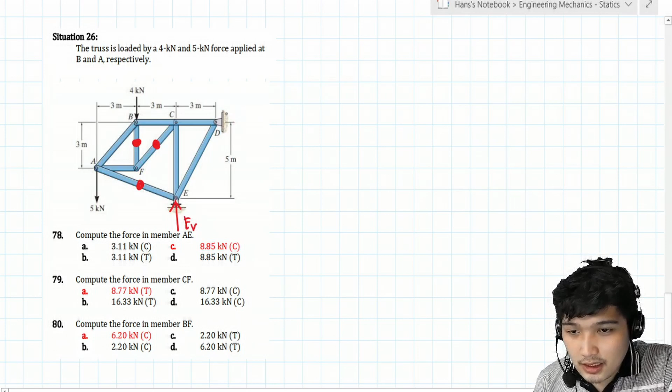Okay, so ano ang first solution dito, class? Always start from determining the value ng ating mga support reaction. So at E, meron ditong roller, so ang support reaction lang dito is yung perpendicular sa surface, which is vertical. Tawagin na lang natin tong EV, support reaction at E. At sa D, ito is naka-pin connected, so it has a horizontal component. Let's say ganyan na lang yung direction, tawagin nating D horizontal. And then pag ganito naman yung isa, yung kanyang vertical component na DV. Okay, unahin nating isolve ang mga support reaction na yan.

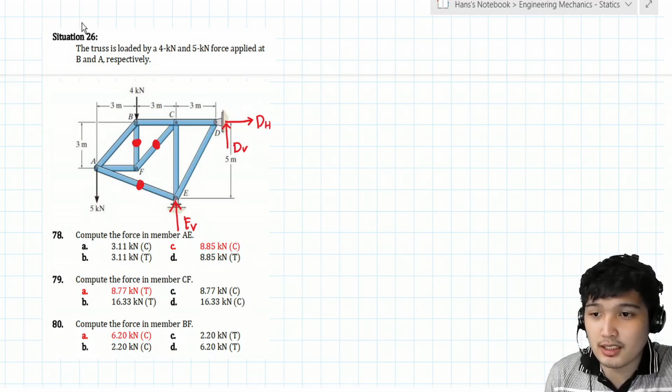So first, start tayo sa summation ng forces along X, dapat 0. Considering forces to the right positive. Ang nakikita mo dyan na horizontal force is yung DH alone, so we can say that DH from that specific problem is 0. Walang horizontal component yung support reaction at D.

So next is paano kukunin yung mga vertical. Pwede nating gamitin yung summation ng forces along Y, dapat 0, considering natin upward forces to be positive. Pero sabi ko nga, class, ito ginagamit na lang natin to counter check, yung makukuha nating mga vertical reaction using yung summation ng moment. Pang counter check lang to. We can say that yung mga upward forces is EV and DV, at yung downward natin is 5 and 4, equals 0. So ito talaga dapat yung pagkukuhaan natin.

So take tayo ng summation ng moment, dapat 0. Pipili ka ng point, di ba, at yung pipiliing point, yung location ng support. So we can try yung mag-summation ng moment at E, dapat 0, consider tayo clockwise moments to be positive. We know, roller support, walang resistance yan sa moment, so wala tayong ilalagay na parang moment reaction dyan at E. Anyways, start lang tayo mag-moment sa E.

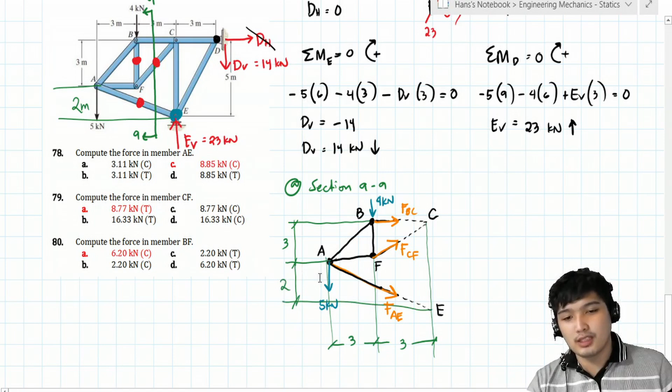So, sabi ko, anong best equation of equilibrium yung dapat natin gamitin para ma-solve natin directly yung mga hinahanap? So I think ang best doon is gusto natin, tatlo yung unknowns dyan, eliminate natin as much as possible yung ibang unknowns.

Kung ang gagawin natin, kung magmo-moment tayo dito sa imaginary point C, etong FBC and then FCF, parehas silang dadaan dun sa imaginary point C. So pag nag-moment tayo, may eliminate sila. And then ang matitira, eto na lang, AE. I think isa yun sa best na equation of equilibrium na pwede nating i-utilize.

So we take summation ng moment doon sa imaginary point C. Dapat 0. So we consider clockwise moments to be positive. And itong FAE,

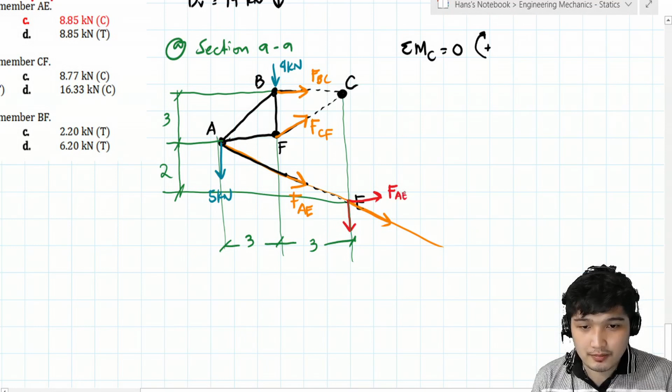Naka-incline siya, so gawin natin, i-components natin siya. By property ng transmissibility ng force, pwede natin siyang dalhin dito kasi ito yung line of action niya. Ang components niya is pwede nang mapunta dito. So ito yung magiging FAE na vertical component, and ito yung magiging FAE na horizontal component. And ito yung vertical.

So paano makukuha yan yung mga components? E di analyze natin yung triangle. So yung triangle neto is what? 2 ang vertical and then 6 ang horizontal. So with that, para siyang pwede nating palitan na lang ng 1:3, kasi 2:6, di ba? So palitan natin ng 1:3.

And this one magiging square root of 10. Okay, so analyze muna natin for the horizontal component, that is yung magnitude ng total force and then times yung horizontal 3 over square root of 10. And then for the vertical one, magnitude FAE and then yung vertical 1 and then hypotenuse square root of 10.

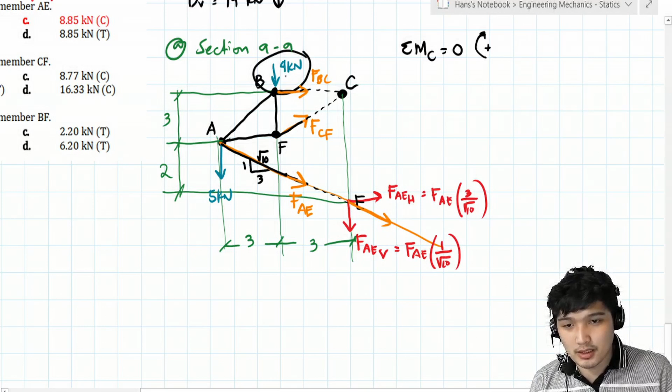Okay, so ayan, start na tayo mag-moment sa C ng lahat ng forces. Pwede mong gawing practice, unahin mo muna yung mga external forces. Unahin natin itong 4. Yung 4, counterclockwise ang moment sa C, ang moment arm is 3. So negative 4 times 3.

Okay, next is itong 5. Again, counterclockwise yung magiging moment din sa C. Ang moment arm is 6. So minus 5 times 6.

And then next is yung mga internal forces. Ito, walang moment, passing through C kasi siya. And the same din dito, walang moment since passing through C rin siya. So ang next is ito na lang AE na ang imo-moment natin is itong mga components niya, yung dalawang yan. Kung consider natin itong vertical component niya, makikita mo yung line of action niyan, dadaan yan sa C, di ba? So meaning to say, yung vertical component, wala rin siyang moment na makikreate.

So sino na lang yung mag-moment? Eh di ito na lang, horizontal. Ang moment niyan is what? Counter, so meaning to say, negative. So magiging negative yung horizontal component na equal sa FAE times 3 over square root of 10. And then yung moment arm niya is itong distance na to, which is yung 3 plus 2, so that is 5.

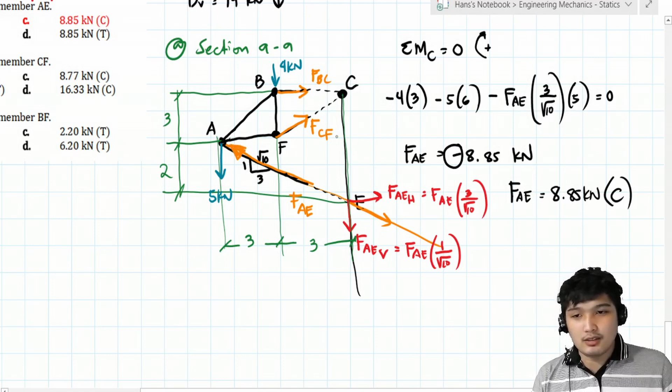So papalitan lang natin to, pwede na natin siyang i-correct kasi alam na natin yung tama niyang direction. So parang pag ganito pala siya, papunta dun sa joint. Ayan na yung FAE. Okay, so anyways, tama ba ang nakuha nating sagot? Ayun, 8.85 kilonewton compression.

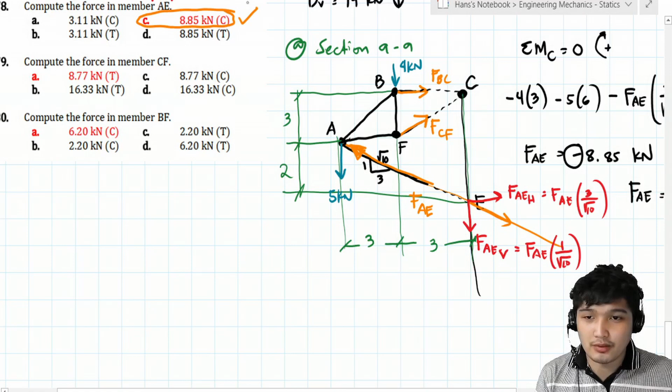So therefore, correct. Okay, next is yung CF. Paano makukuha tong CF class? Isip ka ulit, pwede ka mag-moment sa ibang point.

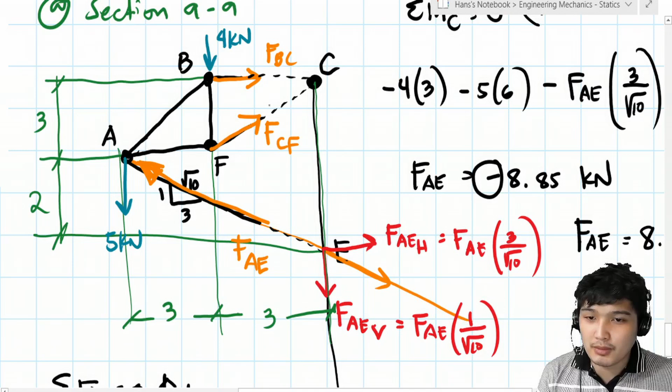From the figure, this is 3, and the horizontal distance is also 3. So it's like 3:3 or 1:1. We can make a triangle from this. It's 1:1, therefore this is square root of 2.

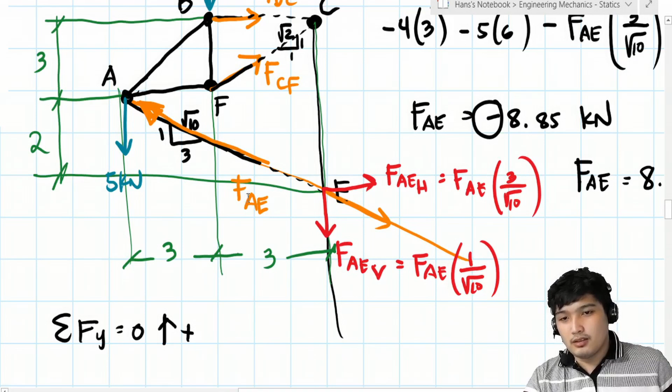Let's start with the external forces. We have 5 downward, and then 4 downward. So negative, negative 5, then minus 4. Then the internal forces, this FAE.

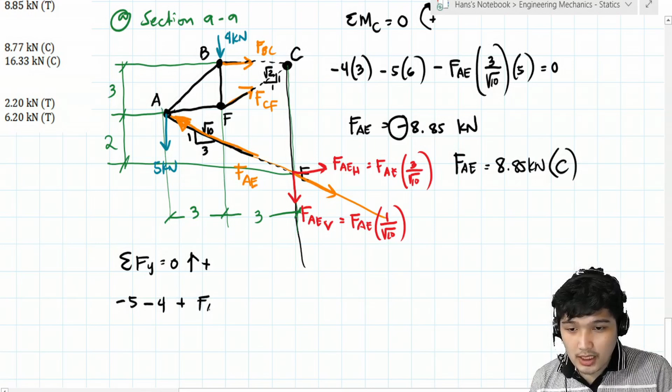What's its vertical component? Upward, right? So positive. FAE, and its vertical component, using the triangle, is 1 over square root of 10.

And this FCF, its vertical component is also upward, so plus again. FCF, and its vertical component is 1 over hypotenuse square root of 2. As we said, FBC is eliminated since it has no vertical component.

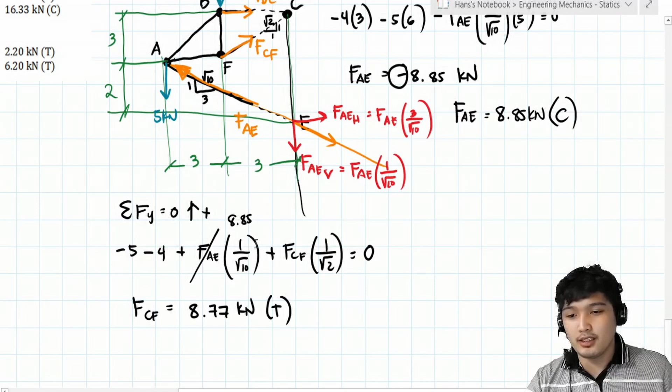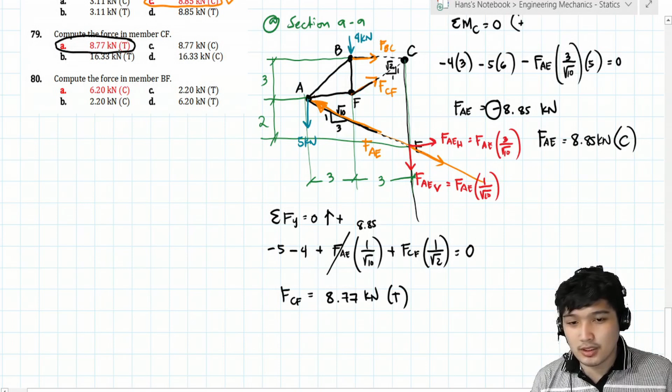It's a tensile force. Let's check if it's among the choices and if it's correct. Yes, it's correct, 8.77 kilonewton and tension. Okay, so lastly, this member BF.